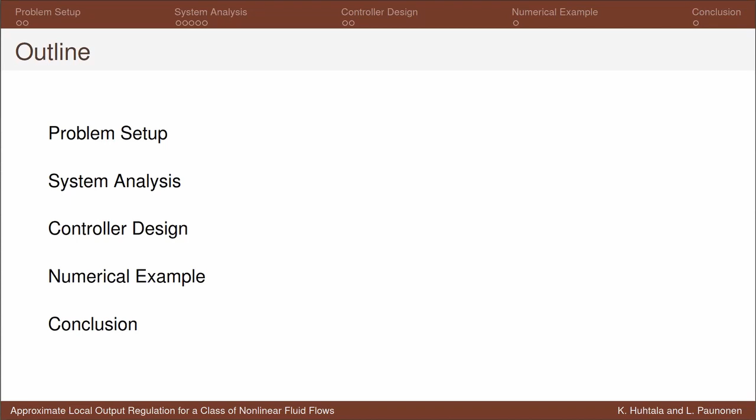So let us focus our thoughts on the Navier-Stokes equations on a two-dimensional domain omega with a C3 boundary gamma. Up until this point, we have the standard Navier-Stokes equations with the viscous term, the nonlinear term, and the pressure term. Then from there on, we have the control term Fu and the disturbance term Fd, and these we'll return to later. Finally, we have the time-independent body force denoted by Fv.

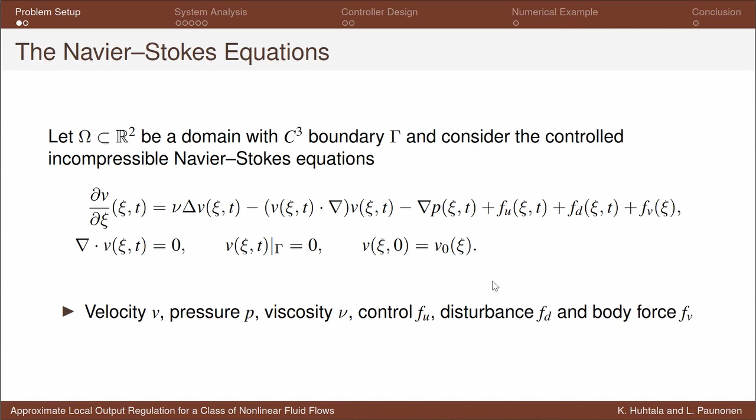Then on the second line, we have an incompressibility constraint here, a boundary condition here, and finally an initial condition. The achievable output tracking with this control method is local in the sense that the initial state as well as the reference signal should be small enough for the control to work.

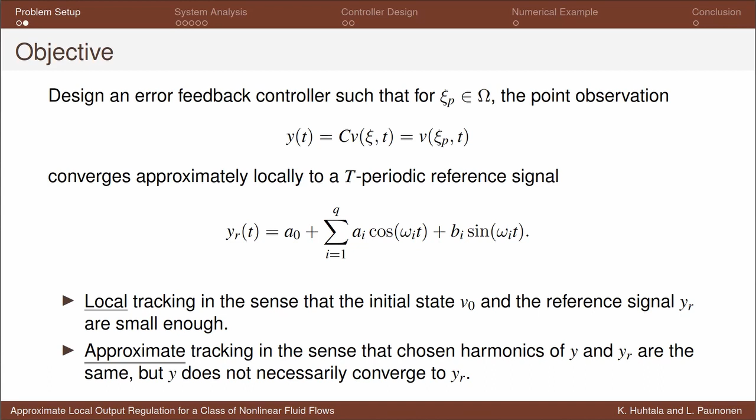And then the control is also approximate in the sense that we do not actually necessarily achieve convergence of the system output Y to the reference output YR, but we only have the convergence for some harmonics. But we do get to choose which these harmonics are.

We employ the framework of regular nonlinear systems introduced by Natarajan and Bentsman, although we do not do so in its full generality, but rather we focus on the parts of the formulation which are relevant to our work instead of the full general framework of the nonlinear systems. Regular nonlinear systems are defined in some Hilbert space X.

And as in the case of abstract linear systems, we have the system operator A, the control operator B, and the disturbance operator BD. But then we also have the nonlinearity F, which is applied by another linear operator Q. And then each of the triples in point 1 should be regular linear systems.

So you can have as the input operator either the control operator, the disturbance operator, or the nonlinearity applying operator Q. And all these triples should be regular linear systems.

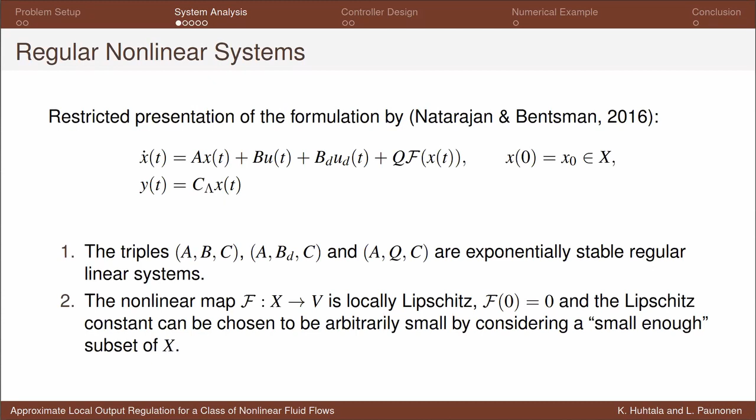And when it comes to the nonlinearity F, it should be locally Lipschitz from the state space to some Hilbert space V. And finally, for the observation, we also included the lambda extension of the observation operator, although, as we will see later, that will not be very relevant for this particular problem.

Choice of the state space is a very central point of this work, and for that we make use of the Stokes operator. So not only does the Stokes operator generate an analytic semigroup on this L2 type state space, but here more importantly, it allows us to define a scale of spaces in that we use fractional powers and their domains of the Stokes operator to define the state space X.

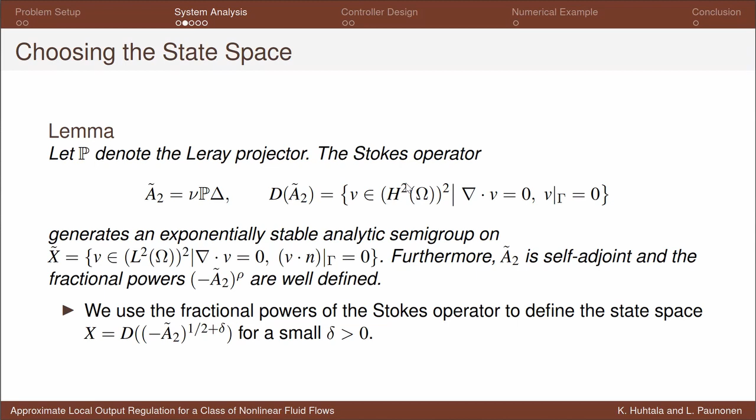So here, the Leray projector P enforces the incompressibility condition of the Navier-Stokes equations, and then the state space ends up being presented very similarly to the domain of the Stokes operator, except that instead of H2 here, you would have H1 plus 2 delta.

So our motivation behind choosing the somewhat unorthodox state space X is to satisfy the local Lipschitz requirements of the regular nonlinear systems. And for that, we now choose the Hilbert space V as a larger space, but still defined using the domains of the Stokes operator.

Now, by choosing the operator Q, which applies the nonlinearity, to be an identity in the space V, Q ends up being an unbounded operator with respect to the state space X, but we do get the local Lipschitz property of the nonlinearity F from the state space X to this larger space V.

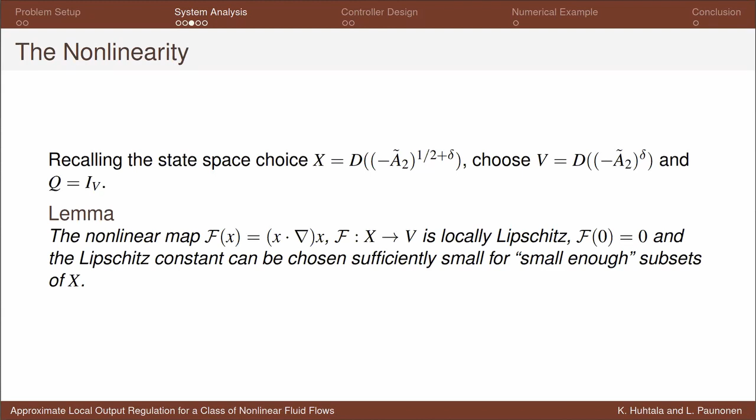So our next goal is to show that the linearized Navier-Stokes equations form a regular linear system. And the first natural step towards that is to verify semigroup generation on the state space X. Since we operate in this lifted state space X, we need some more smoothness from the body force Fv, namely it has to be H1. And then we also here make use of the fact that we assume the boundary of the domain omega to be of the class C3.

Starting from the semigroup generation result for the Stokes operator in the L2 type state space, we work our way to verifying that indeed the linearized Navier-Stokes equations on this lifted state space also generate a strongly continuous semigroup. And on top of that, if the viscosity constant is large enough, then the semigroup generated by A is exponentially stable, which is what we want.

Finally, we note that in the definitions of the control and disturbance operators, we make use of these shape functions G and G', which then lead to the control and the disturbance spaces being finite dimensional. So the actual control and disturbance inputs are just the terms U and UD.

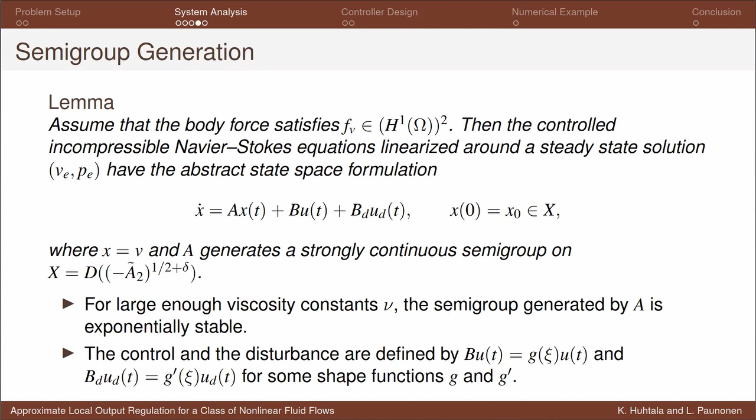We have the following result regarding presenting the linearized Navier-Stokes equation as a regular linear system. So we consider the linearized Navier-Stokes equations around a steady state solution of the full nonlinear equations. And then we demand slightly more than L2 smoothness from the control and the disturbance shape functions.

Now with these assumptions, taking any of the control operator, the disturbance operator, or the nonlinearity applying operator Q as the control operator of the triple of operators, we have that the triple is indeed a regular linear system in the lifted state space X.

Because of the lifted state space X, we now have sort of a trade-off situation between the control and the observation operators. So usually an in-domain control with an L2 control shape function G would already be a bounded operator. But in this lifted state space, the control side becomes more unbounded. So these slightly smoother than L2 shape functions lead to an admissible control, which is not, however, a bounded control operator.

On the other hand, a point observation is a quite unbounded observation compared to the weighted average observation options, for example. But for this lifted state space, even a point observation ends up being a bounded operator from the state space to the output space R. And now we can quickly return to just note that because the observation operator ends up being bounded, the lambda extension of it does not really play a role here. So the extension ends up being the operator C itself in this case.

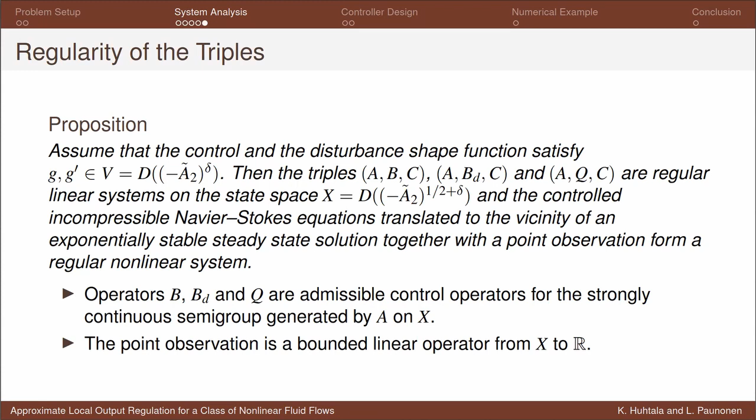Putting our results together, we have that the controlled Navier-Stokes equations indeed do form a regular nonlinear system, and thus we can implement a low-gain error feedback type controller introduced by Natarajan and Bentsman to take care of the output tracking problem, which we recall was a local and approximate one.

This controller only requires information of the transfer function gains of the linearized systems. But since we are probably measuring gains from the full nonlinear system, it is worth noting that the robustness of the control solution means that the nonlinear system gains can indeed be used for the controller construction anyway, so we don't have to figure out the linear system control gains.

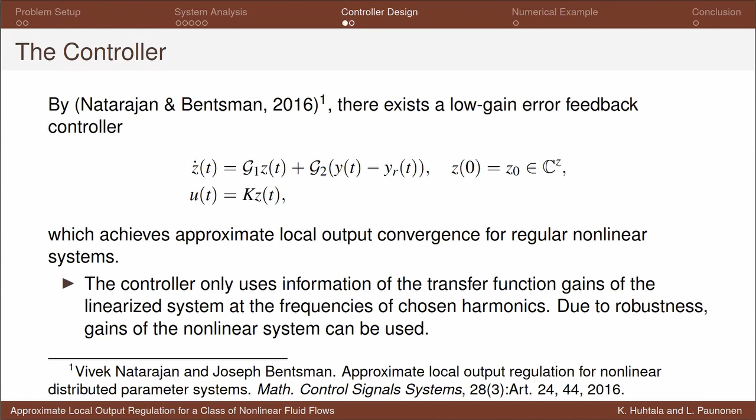Now returning to the achievable output tracking using this controller, we note that on top of the initial state of the fluid and the reference signal being small enough, we should also have a small enough initial state of the controller as well as a small enough disturbance signal. Then we choose a finite number of harmonics to be accounted for during the controller construction.

These chosen harmonics of the reference signal and the system output will be matched, but the tracking remains approximate in the sense that other, typically higher, harmonics induced by the nonlinearity of the system will not be accounted for in the tracking. Finally, we note that the disturbance signals to be considered are of the same form with the allowable reference signals YR.

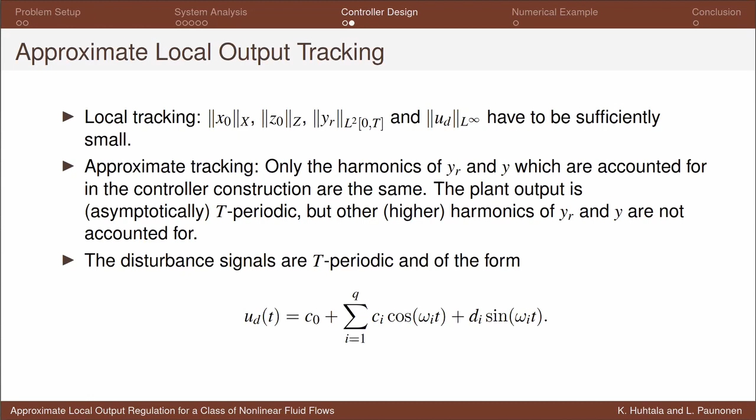Moving on to a numerical example, we consider the Navier-Stokes equations in a unit disk and choose a viscosity constant 1/25, and then check numerically that the linearized system is exponentially stable for this choice. We control the horizontal component of the fluid velocity within omega u and disturb the vertical velocity component within omega d while observing the horizontal velocity component at the point xi p. We include the first 4 harmonics starting from 0 into the controller.

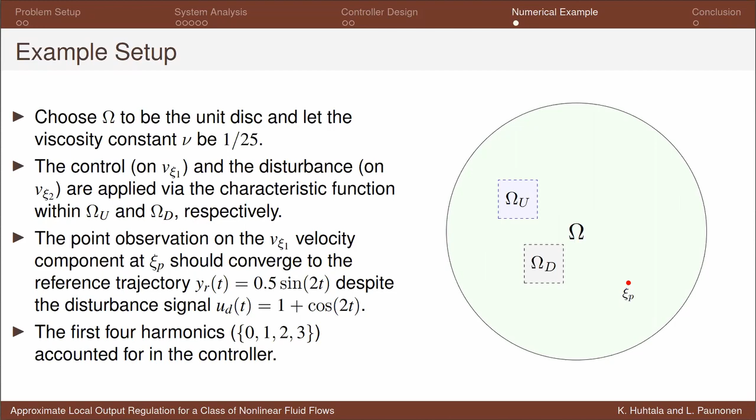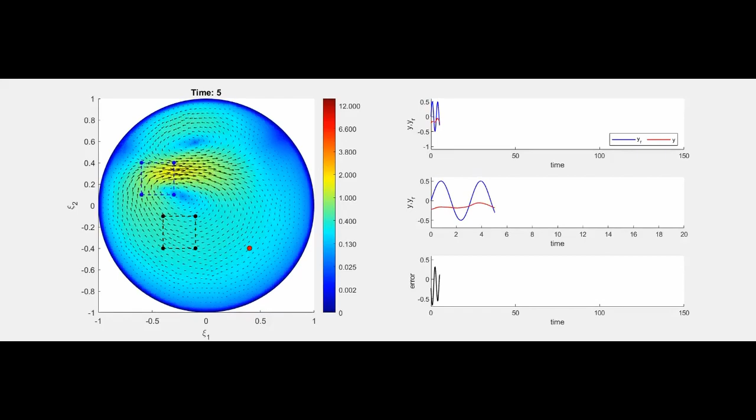Onto the simulation. Here we denote by blue the control region, by black the disturbance region, and by red the point observation. And then we have on the right side plots for the system output compared to the reference output, and then for the regulation error over time. Here we note that the color bar is chosen to be nonlinear to get a more indicative color scheme denoting the fluid speed within the unit disk.

So for this simulation, we used MATLAB, and the spatial discretization for the Navier-Stokes equations was performed using the finite element method, and then the time development uses the Crank-Nicolson method with a Newton iteration.

And as we can see, the convergence isn't too fast, but we also do not experience many overshoots, which is sort of normal for the low gain control scheme. So you typically have somewhat slower output convergence compared to some other controllers, but you also don't suffer from overshoots.

And by the 120-second mark or so, you have very little error left in the system. Some of this is probably due to the numerical errors, but it's partially also from the approximate nature of the control.

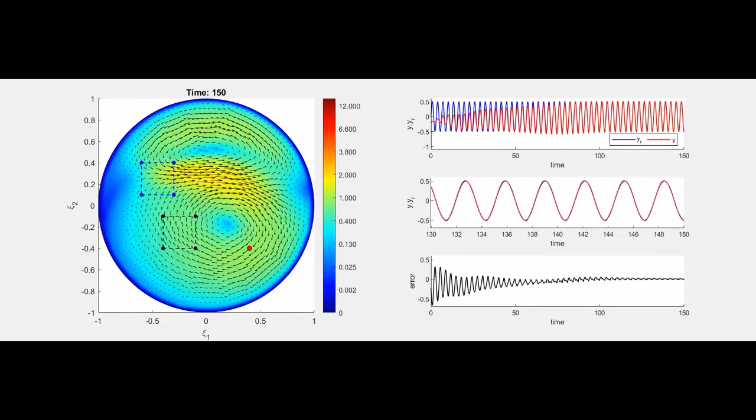To recap, we formulated the incompressible Navier-Stokes equations subject to in-domain control and disturbance and a point observation as a regular nonlinear system. And the state space was chosen to be a smooth enough space so that the nonlinearity of the Navier-Stokes equation is locally Lipschitz in this case. We then implemented an error feedback controller to achieve approximate and local velocity output tracking for the Navier-Stokes system.

To directly apply these results, one should consider a viscous fluid with a first order nonlinearity, and then the problem domain together with the boundary and boundary conditions should be such that the equation does not suffer from loss of regularity of the solutions up to the used lifted spaces.